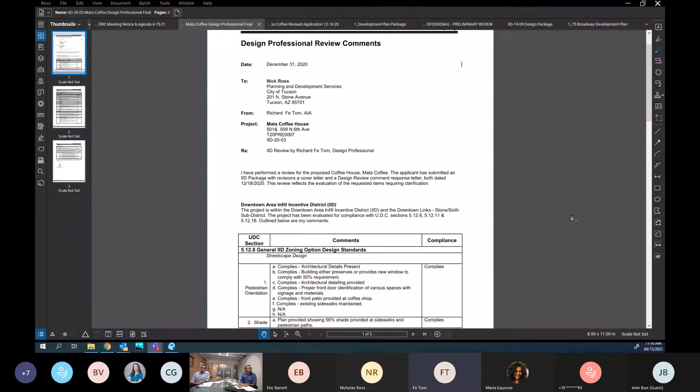Okay, thank you. Let's see, I don't have my notes here in front of me. Fe, I have added your approval recommendation on the screen, so if you want, I can scroll through this as you discuss, if you like. Okay, that'll be fine.

With regards to the streetscape and the requirements for the IID zoning, the pedestrian orientation, we went through all the variables that were there and found that they complied with that. The shading part of it was also in compliance.

The next one is parking. I think, from our standpoint, it was compliant. For the Downtown Links district, the permitted use is compliant. The historic preservation, we found that to be in compliance. The loading, solid waste, landscaping, and screening, that was in compliance.

And the landscape was in compliance. Solar exposure was in compliance, parking compliance. Alleyways and pedestrian access ways were in compliance.

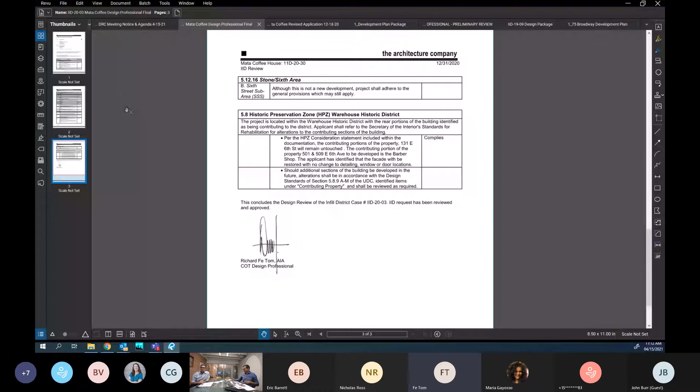Thank you, Fe. For the committee's information, this project did go to the Plans Review Subcommittee on March 11th, where they did recommend approval as presented, excluding the change from the garage door to a window on building 509 facade, and excluding the signage, which will be reviewed later. Mr. Chair, I think that concludes the staff presentation.

If you're open to it, I think the applicant is available to now present their design package. Okay, ready for you, the applicant, to do the project presentation. Richard, you're muted - if you want to share your screen, you're more than welcome to, otherwise I have your application up as well. Yeah Nick, we just unmuted. So in terms of sharing our application, you just want us to walk you through the gist of it?

Go ahead, I don't know if you can see my screen, but I'm in the middle of your application here. If you have additional materials you'd like to present, you're welcome to, but this is what was provided to the DRC ahead of today's meeting. That's all I was going to do, pull my copy of that same package up. I wasn't exactly prepared to make a presentation because I thought everybody knew what was going on, but that's okay, we can make it up as we go along.

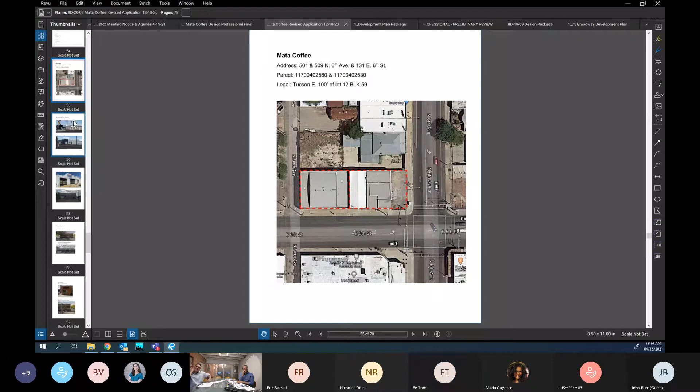I should look to see if there are better slides for me to talk through than this. I probably should control over this. Can we take control of it, Nick? Feel free to share your screen. Okay, so then we would pull up ours. Isn't it there on the right? I turned all my stuff off. Let's move it over here. Okay, let's see, this is a terrible version of this, it's so small. Give us one second here, guys, let me get up to speed. I'm going to share my screen right now. I don't know where the share screen button is on this, is it the arrow on the right there? That's correct, it's the arrow in the little box. Got it. All right, so everybody can see our screen right now? Yes.

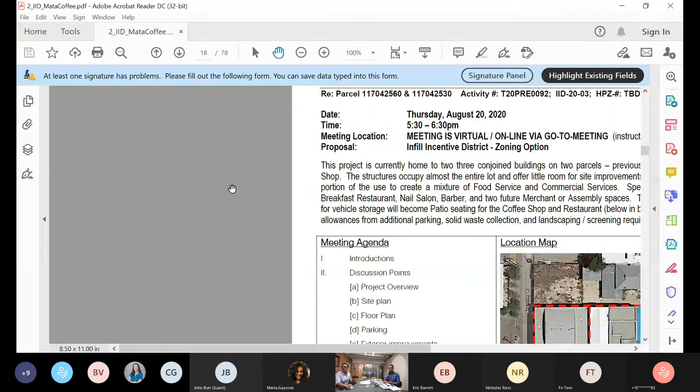Let's zoom in here. This was the same image we were just looking at, but I wanted to pull this slide up so this area is highlighted in blue. Again, two parcels with buildings entirely built out on the whole parcel, with exception of this little blue strip here. That was previously paved area that the auto repair shop used to store cars. It has ingress and egress off of 6th and 6th that we're proposing to fill those curbs in.

Transportation requested that we fill this in, and we would like to turn this into a covered patio area. I should back up and say we have this entire area right now that we want in our IID. The work we're doing right now is limited to this area here. What we're proposing is a mixed use development. We would like to put a coffee shop right here, that's why we're calling it Mata Coffee. We would like to put a barber shop right here, and an eyelash salon here. This will be a future restaurant where we're building the kitchen out right now but not the rest of the restaurant. The idea is that this patio area would serve these uses, focused for breakfast and lunch.

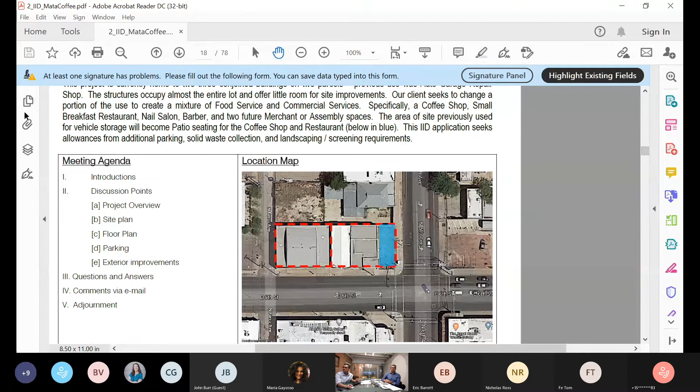Miguel from Forge Architecture also. What Richard Worley said was TDOT did not find any parking in the blue area that met requirements, and TDOT also didn't like that the curb cuts were so near the intersection.

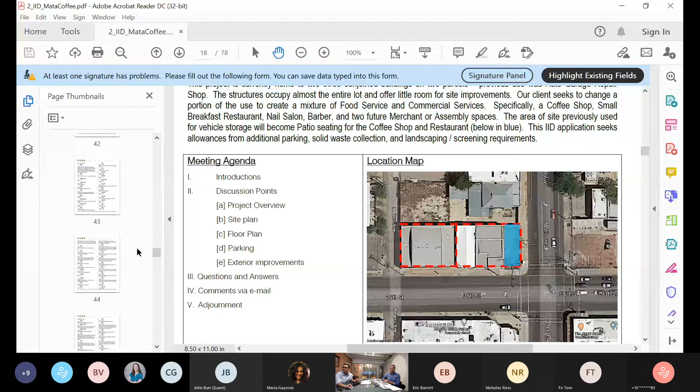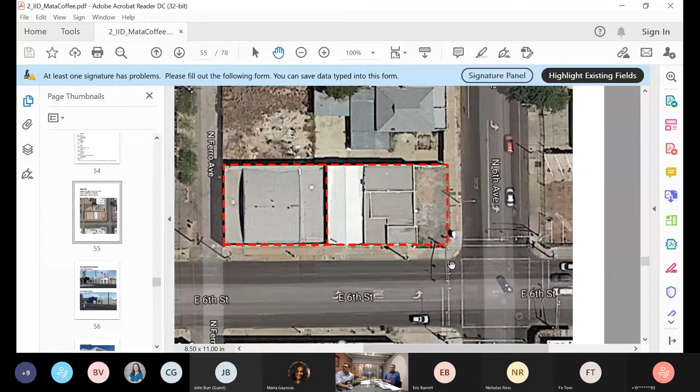Let's move on here. These are some views of the outside of the building, so let's back up to this slide. So you're standing here looking in this direction. What we're looking at here is the unpaved area that used to be the automobile storage, where we're proposing our patio. This building here is not historic. This building here is historic. The rest of the buildings are not historic.

We're putting our coffee shop in here, our barber shop here, eyelash salon here, future restaurant here, and patio out here. This piece here is the only part that was historic, and we're keeping it intact, making no changes to it. We are making facade improvements to the area that was not historic. This area here is part of our project that we're including in our IID, but we're not doing any work in this part of the project.

Let's go down, another view of looking at it a little bit closer from the 6th Avenue side.

Precedents that we thought were good precedents of things in the area with uses like restaurant, entertainment, tap and bottle, XO Coffee, and the Royal Room.

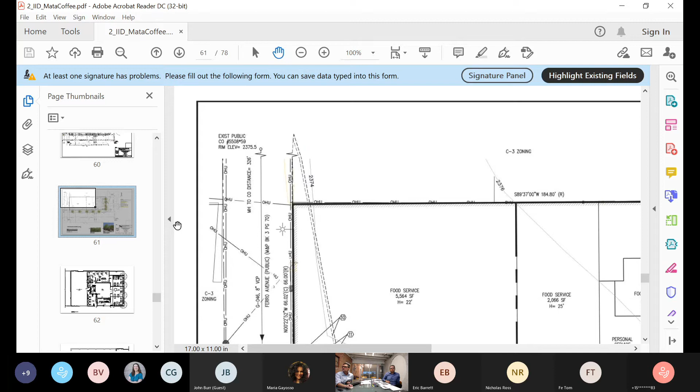Let's go through here, zoom back out a little bit. This is the landscape plan. We're proposing to increase trees along 6th Street, mostly for shade. This is our covered patio, and we also have trees and plantings in this area as well.

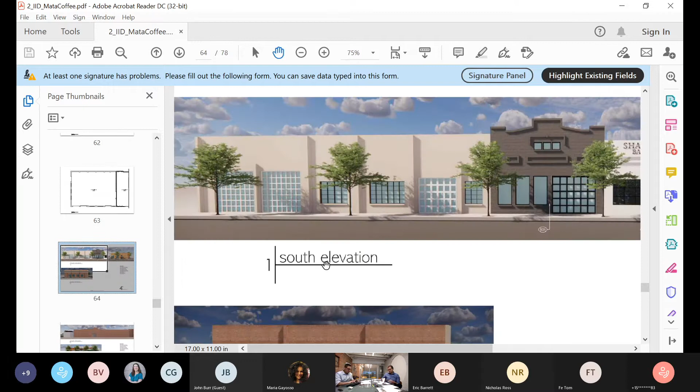Elevations of our intended design. Again, if you recall from the photographs we just looked at, this area is a historic building, no change. This is also a historic building, no change.

This area here, we're putting a screen wall over it just because the building was small. We didn't really think it had much street presence, so we're trying to make it look a little bit more interesting.

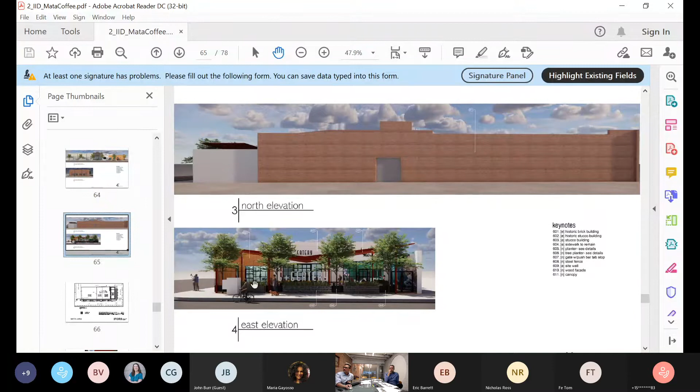This view is looking at it from 6th Avenue. This is the elevation of the patio that we're talking about building here. And this is an interior shot of the patio.

I'm going to talk a little bit more about the patio, Richard. So the patio used to be a garage, and there was a mid-century modern kind of cool canopy over it. So we took some inference from that.

Obviously it had been ripped out, so we created our own take on a big, impactful canopy that created all the outdoor seating. We wanted to create a lot of presence on the corner and a lot of visibility, even though we know we're going to have a little bit of a problem with homelessness.

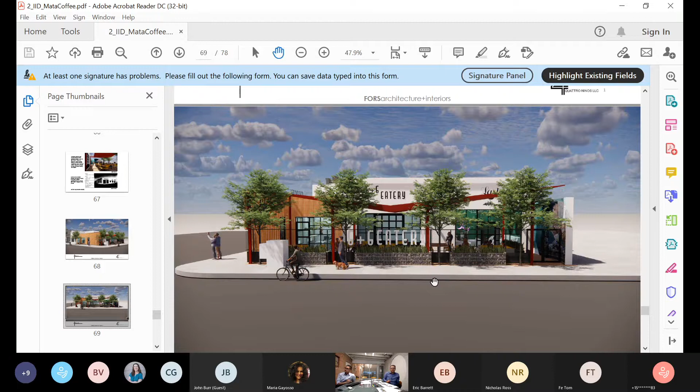We wanted to create a lot of shade because the spaces are pretty small, and these didn't have any interior seating on this side. So most of the seating is actually all exterior, on the breakfast eatery and on the coffee shop.

So let's go back to this view here because it kind of encapsulates the whole project. Again, the historic piece that we're keeping intact, that will be the barber shop. This is the area you were previously looking at, and that is our coffee shop, which kind of wraps around the corner.

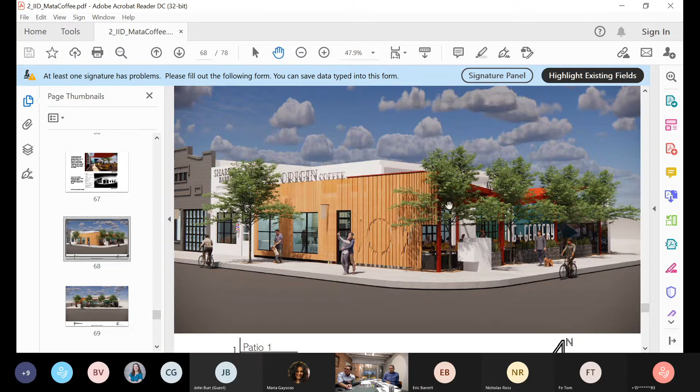So this is 6th Street, and this is 6th Avenue over here, and the covered patio that we're proposing to serve the coffee shop and the breakfast restaurant.

Again, some enlargements showing the feeling we'd like to have on the patio. We're proposing a mural down on this end, with trees for covering. Again, this is mostly to serve for seating because the spaces were so small for the coffee shop and the restaurant that we needed this area for seating.

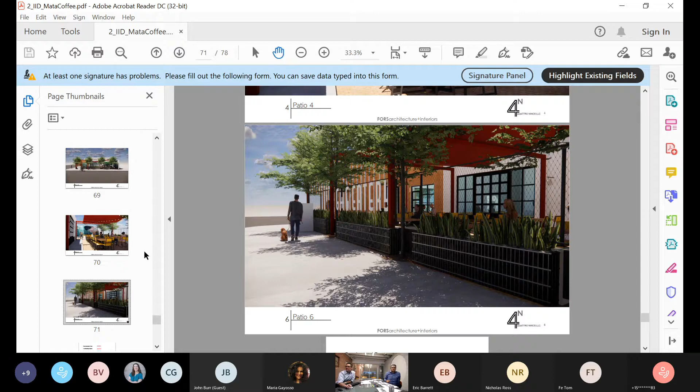This is the view of the streetscape we're proposing. Again, we believe this project would enhance the street with the trees, improving the urban area in terms of having people out here congregating. We thought it would be a nice addition to the neighborhood.

The very end of the proposal jumps back to the historic elements I already alluded to. Everything in red is historic, and everything in blue is not. And again, this is our patio.

So again, this is the area where we would be doing the facade improvement work, and this area we would not. Those areas in blue, including the one immediately adjacent, already have tenants.

They are all actually their own tenants for all these spaces. The owners are going to be occupying all of them, but they haven't secured tenants for the ones to the west.

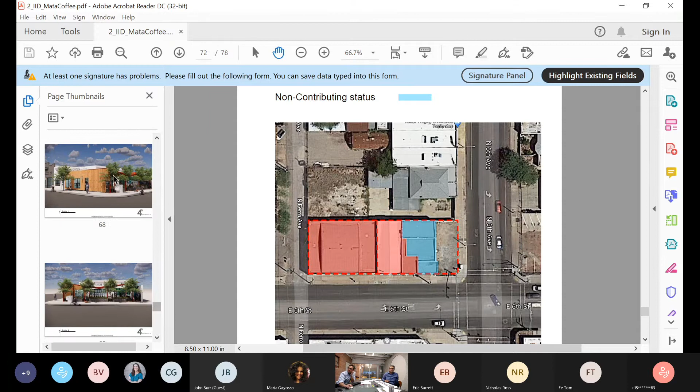So I think that's about it. Nick, I'm going to back out to this slide.

Would you like me to give control back to you? You can stay controlling the screen because I think the DRC is probably going to have some questions for you, so it might be easier for you to navigate.

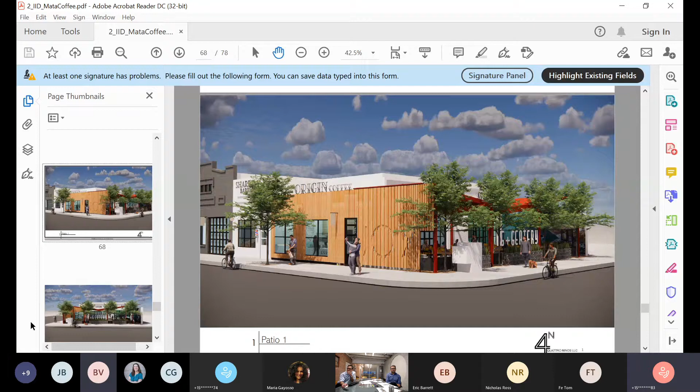Other questions? This is Bill, I have a couple questions. The south facade of the building along the coffee shop, what's that to be made of?

That material is called thermory, and it's a wood that comes from Austria that's oven-baked. It's a special material that we can use. We just used it in a house in Rocky Point, and we're using it in a couple other projects. It's especially made for extremely hot, arid climates.

And what's the overall square footage of all the buildings on the site? Gosh, I don't have that up. I think it's about 9,000 square feet for all the buildings. It's definitely in here somewhere, let's see, development package.

While you're doing that, Nick or Fe, do you know if there's parking on the street on 6th Street or 6th Avenue? Is there metered parking? No, there's not. This is Miguel. There's a lot of parking basically up and down 6th Avenue on both sides of the street. There's no parking on 6th Street, but there is on 6th Avenue, both north and south of our intersection.

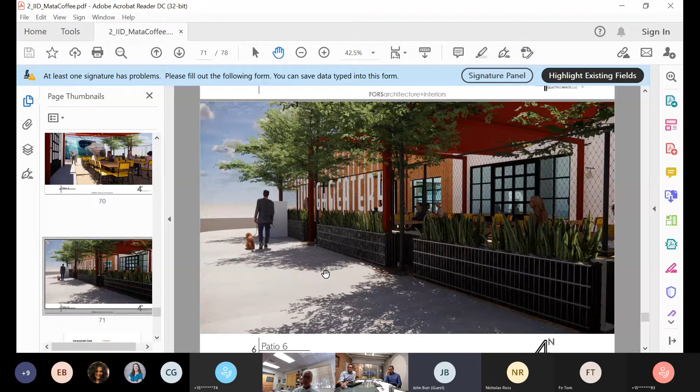On your initial application, it showed that you were providing 2 long-term bicycle spaces, even though no parking, but that's not showing up here. Are you providing any racks for pedestrians who bike in, maybe in the north part of the courtyard near the art wall, or for staff? Or are they all expected to walk in and leave their bikes elsewhere?

Well, this project is actually concurrently in building review right now, and of course we would have to meet those standards based on the building review. So the answer is yes. Right now, the plans submitted and currently being reviewed have bike parking in this area, long-term and short-term. Ultimately what was submitted was the first round of the development plan in order to generate comments for this IID. The second development revision is happening right now, and it also has to meet city standards for bike parking, showing bike parking in this area as well.

So you're committed to put in short-term racks for your clientele in that area, but not a specific number yet until staff tells you how many? Well, we know how many, I don't recall them off the top of my head, but we're required to meet a land use code standard for long-term and short-term, whatever that number was in our plans. I don't really recall it off the top of my head. It was not a lot. I think it might have been like 2 short-term, 2 long-term, something like that.

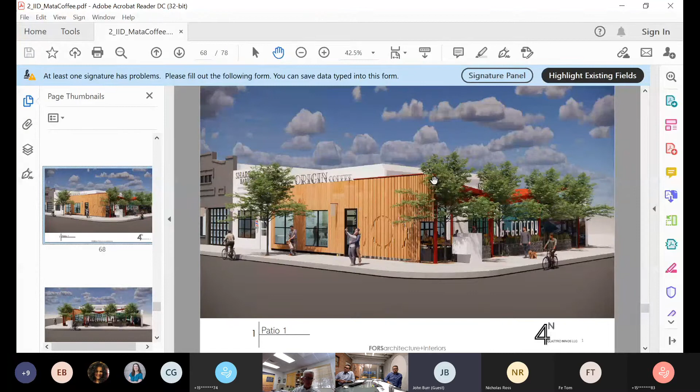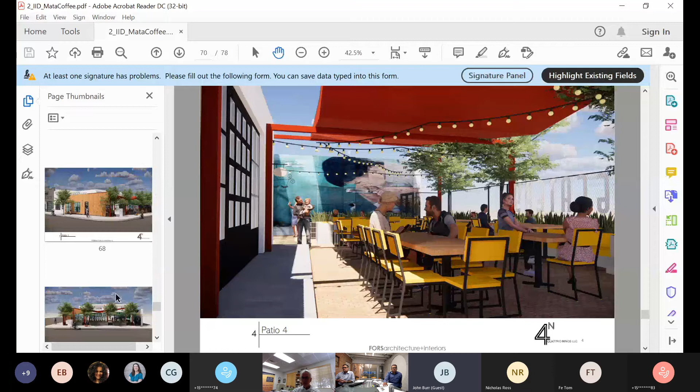But it led me to further questions, because we're talking about existing buildings with all the windows as they are. I started to look, and there hasn't been a permit pulled on this property since 2004, and the current owner purchased it in 2014. Yet magically all these changes have happened. For instance, the non-contributing building has been stuccoed and you're now popping windows in, and the placement of the doors and windows on the east side have changed.

And magically, from a stuccoed front, the barber shop now has a gridded frame window that is listed as contributing, but farther down in your package it's showing the historic property card that shows it's a Spanish colonial building that actually had a tile roof, and Google Street Views show that was removed in about 2014, somewhere between 2013 and 2015. I'm a little surprised that contributing properties in a city historic district have never been reviewed for all these already existing changes.

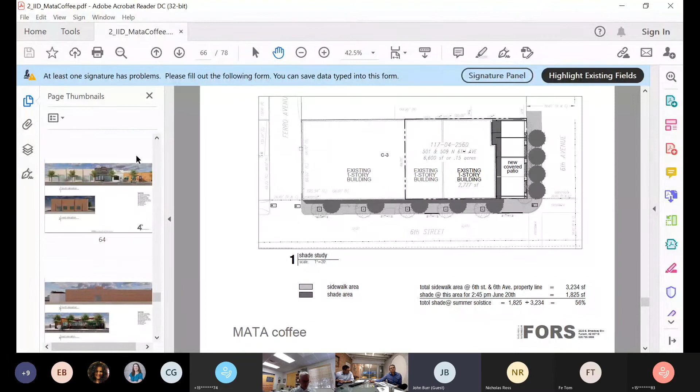The tile roof was taken off. Your new facade suggests you're taking off the parapet on the barbershop building on the east end, and I don't quite know why. I don't want to just magically approve this project saying that's existing, so everything that's happened to date actually meets all standards, because the barbershop building now has lost every character-defining element to it. So I kind of have a problem with that.

Well, let me jump in. First of all, the barber—we have not eliminated the existing parapet. We actually haven't done anything. I think what you're talking about is the wing wall that faces maybe east. I'm not sure which one you're referring to.

Yes, the eastern parapet wall that you just see in profile from 6th Street, but you can see it as a full-on parapet from 6th Avenue. Right, and your facade no longer shows that, and the tile roof that was the contributing defining feature was removed without a permit within the last 7 years, and it's not proposed to be there. So theoretically, I'm not sure it's a contributing building anymore, because it's lost all of its contributing status, unless you're proposing putting a tile replacement roof on that particular facade again.

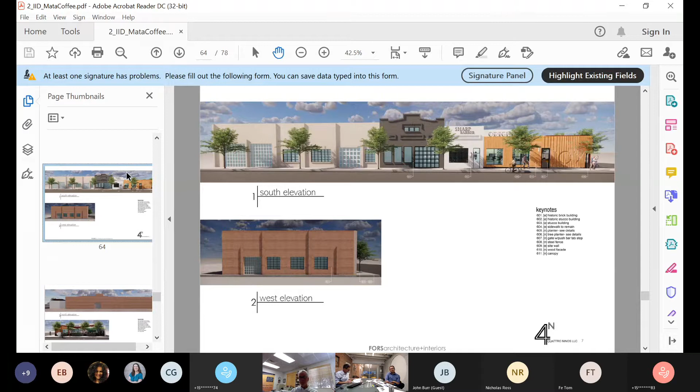Well, we're not aware, first of all, that our client removed that. We took over the project with the facades as they are now, and we did step in and show all the photos to historic. That comment did not come up with historic, and I was not aware that we would have to verify that and verify your photos. Not saying that's not right, but we were not aware of any of that happening with this client or them ripping it out or having removed it.

I appreciate your standing, and you've come in fairly recently with an existing building, and I think you did a great job adapting it. I really don't have a problem with your whole concept or the plans we're approving today, but I don't want to backdate an approval for what was pretty much an egregious, unreviewed, substantial change to a contributing historic structure that should be commented on before it just keeps moving forward.

And you can see the tile roof if you scroll down to the bottom of your package and look at 139 East 6th Street, and it does indeed show those tiles. And then if you look at the timeline on a Google Streetscape, you can see exactly when it disappeared.

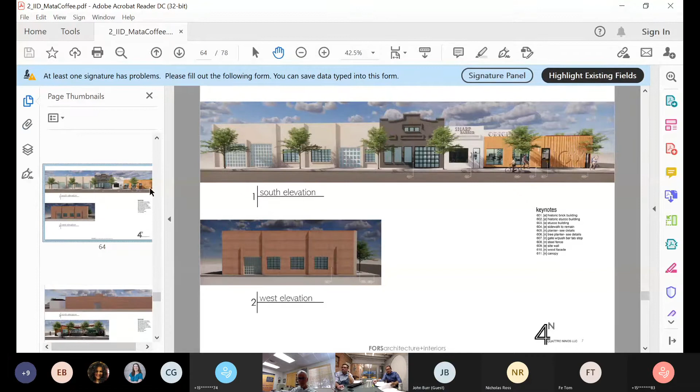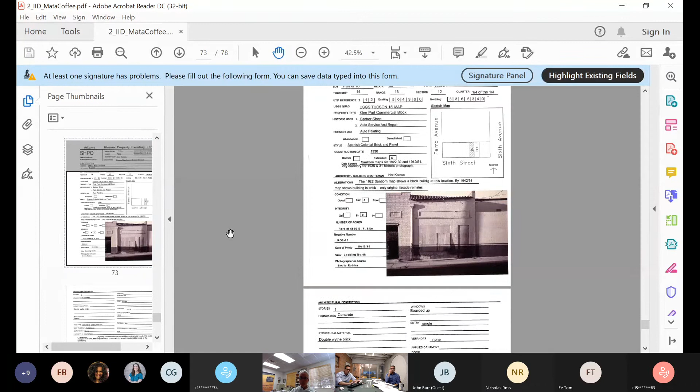Yeah, I'm just not sure when. That photo doesn't necessarily mean—I know you said you checked it back in 2014—but I don't know that photo is actually recent, sometimes they reach back to older photos of the properties when doing the assessment for contributing versus non-contributing. It's an ancient photo, it's black and white right here, not recent. It's from 1995, but that tile roof was there as of 2013, and it was not there as of 2015, and that was really the only thing on the facade that made it Spanish colonial.

This is Nick. Yeah, we do have Jody Brown, our historic preservation officer, on the call today.

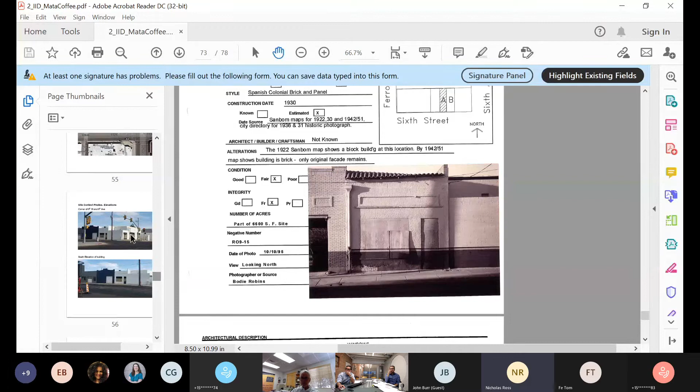Jody, are you available to comment on the significance of that tile roof and what that means for this project?

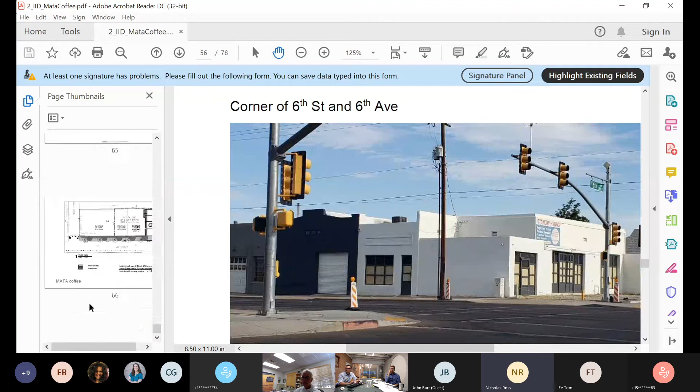Sure. I'm not aware of the building being delisted by SHPO. It is a contributing resource to a National Register district, so it speaks to the whole. It's not like an individually listed property where integrity would have to be pretty pristine or pretty high up there.

I don't think the removal of the tile roof is a good thing, for sure, because it definitely gave it a nod to the Spanish colonial style, but it wasn't something I would categorize 100% as Spanish colonial, and I don't think removal of the tile would necessarily delist the building.

It is something that was probably removed. I mean, it was probably just a little shed roof that was up there. It was a decorative feature, not a full tile roof. Likely they didn't get a permit for it because I didn't see anything for it, but I don't know that they would have had to. They weren't doing any other work associated with it. It's a minor modification, so I don't even know that that would have triggered a permit.

Okay, fair enough. It's not ideal. I mean, it's historic fabric that was removed.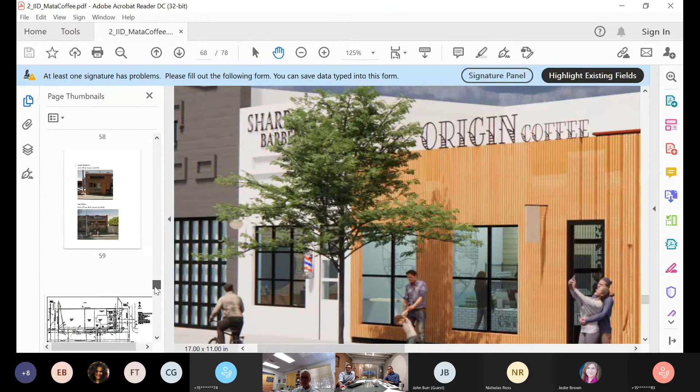We can chime in. Again, this is a conceptual rendering, and in the building plans we submitted, there's no work happening to this facade at all. This little area here that looks like we extended a parapet, we did not. This piece above it up here is not in the plans we submitted to the city. We said we were not doing any work to that facade, and we're not. It's going to look just like this, exactly like this, with no signage, nothing.

We're working inside on that parapet, but we're not touching that parapet itself — we're not ripping that down. We're not doing anything to this building. It's just that in the rendering, the little tab is not shown. The rendering makes it look like we're tearing this down or filling it in, but we are not.

Okay. Are all the windows that are there now steel or aluminum? Steel — they're all steel, it's a steel storefront system, the doors too, all along the east, and the replacement windows in the barber shop. Yeah, all these windows are the same. They were custom windows made out of steel.

Okay, and it looks like you're going to close up some of the driveways on the curbs. Are you planning on closing all of them? The two to the far west are actually some of the old 1938 concrete with scoring patterns, so they're like what's left of the streetscape. I'm not sure it will matter because that's going to be a major corridor pretty soon, but I'm sure TDOT has something to say about all of that.

But TDOT asked us to close those up because they don't want the ingress and egress too close to the curb and to all of these facilities. So they asked us, as a condition, to close these up.

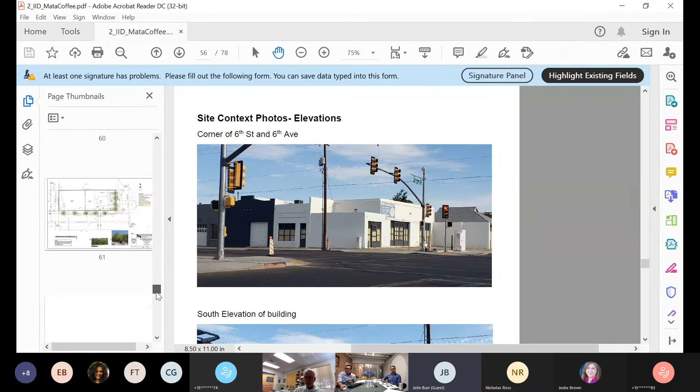Yes. Do you think that will be sufficient if you expand all of that area eventually to food service, or will you have to make other accommodations as you expand further west?

Well, I can answer some of that based on our experience, having done over 20 restaurants in the downtown area. We start with the idea that it's all rolled out daily and put out there, because in our projects downtown we've had almost every other day pickup for trash, in order to accommodate those, and the ones we've done down 4th Avenue.

We're not in a vicinity right now where we have a compactor, which obviously in the future will alleviate this. But we have a plan also with the owners, because they also own the Tucson Blue building, which has additional trash. So we would probably accommodate or be able to expand the trash storage based on usage.

Okay, but you think it's certainly sufficient for what you're proposing currently? Yeah, because the coffee house is, as you saw, pretty small.

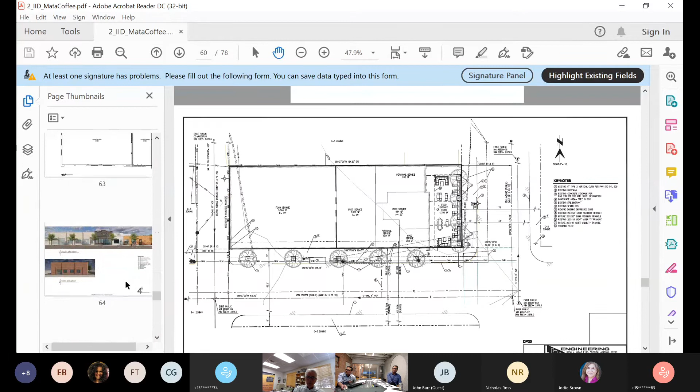There's no seating in the coffee house. And also the future breakfast place, which will be only morning and lunch, based on our experience and analysis, we're okay right now. But the owners have talked about adding, if they need to, down on Tucson Blue.

Okay, and what do you think the full maximum occupancy of the site will be? Just for people? Yeah, no pets. No, I meant occupancy, as in, because we don't really know what's going to go in the left and the right.

But obviously we would be at a plus 250 occupancy for interior and exterior seating if they were to do those functions to the west, which there's no guarantee of either. But in the current area, it's probably more like no more than 75 on site.

Yeah, I mean, we're pretty tight. We're showing more seating there than I think we're even going to get for. Because most of that where you see dining right there, that's actually turning in, since most of that project is going to be all kitchen.

Because of what you're seeing right now, the build out on your plan is just the back of house dishwash. So there's still the cook line, storage, refrigeration, and all that, which pretty much takes up that whole footprint.

Okay, all right, I think that's it for my questions. As I said, I don't have a problem with the concept you're presenting today. It was just some of the background issues that I had. Got it. Yeah.

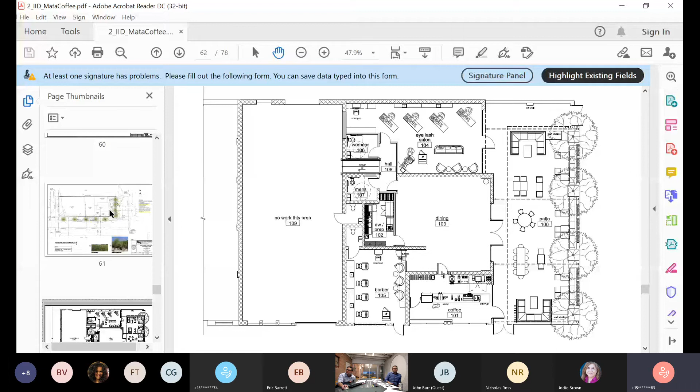The 6th Street mesquite trees, and in the neighborhoods in the Northwest, University has had a pretty challenging issue with mesquite trees breaking up sidewalks and curbs and uplifting pavement. So how are these trees being planted to prevent that from happening?

Well, right now we were hoping for the standard 4x4. TDOT said they might have an issue with those three to the west, and we might have to pick a smaller tree that's in a raised planter. The ones to the west are the last three. They might have a problem with those being in the ground with all the utilities there, and they might make us do a box tree that's raised and different.

Okay, can you expand on that some more? I understand utility conflicts and issues with that. Can you also explain, is this going to be like a 5-year plan where you change trees out every 5 years, or what's that look like? Because trees in boxes don't last long.

Well, it depends what tree it is too, right? Is that you, Eric? Yes, it's me, Eric. Hey, Eric, sorry, we can't tell on our screen right now because of our screen share. Well, Eric, we were going to let Norris, our landscape architect, do the final selection if it has to change and we can't go in the ground. But sure.

They were talking about trees that could survive in a box, but it wouldn't be a mesquite. I'm not going to object, I don't mind them picking the tree, that's all fine, I don't have any problems with that. It's just more of, again, it's like a fish in a fishbowl. It's only going to live for so long, and at some point it's going to need to expand the box.

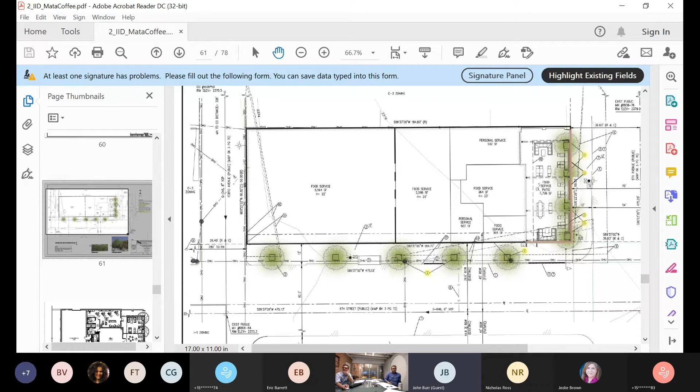Is there a motion? I have a procedural question. Nick, if we want to make sure there's a little bit of oversight so it doesn't look like a chain link fence, can we direct that be approved by the design professional? The specific material, is that what you're referring to? Yeah, so that it's compatible with the character of the overall design and not just a chain link fence.

Yes, we can have the design professional review the screen material as part of their building package submittal. And everything for 131, 135, and 137 will have to come back to both us and plans review? You're referring to the historic buildings to the west of what they're proposing? Yes, so any exterior work that is going to occur on those buildings will need to go back to PRS and the DRC for your approval.

Okay, is there a motion for approval with conditions? I could try one. Okay, in the matter of IID 20-03 Mata Coffee, we recommend approval as presented with the following conditions.

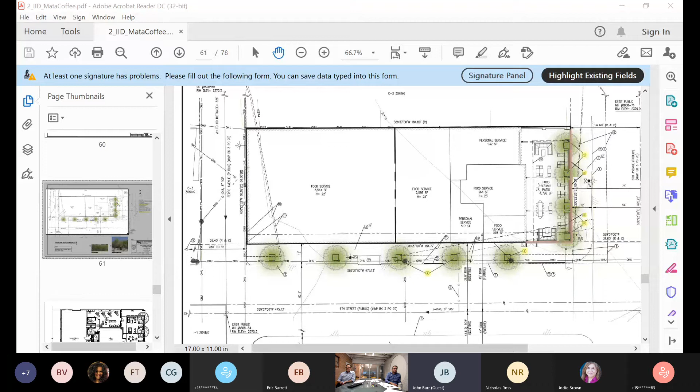Good luck with it. Thank you. Thanks for taking the project on. We like the hard ones. With no budget. All right, thanks, guys.

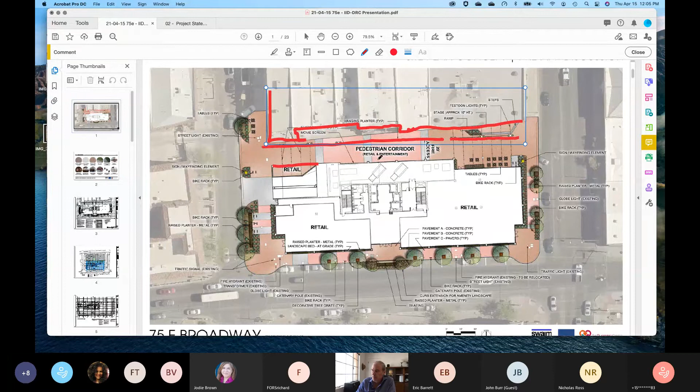So this project is focusing on the south side of the site. The other thing you can see in this photograph is we do have a column line that runs basically along the existing alley easement. So we are working to acquire the alley from the city of Tucson and be able to basically cover that alley, restrict the access for only fire and after-hours deliveries, and then keep that mostly an open pedestrian area to create this kind of permeability through the site.

And then we have some other modifications to the buildings to the north that will basically enhance that pedestrian connectivity. I'll show you in just a second.

One thing I do want to point out is our development team that is acquiring this property also currently owns the entire north half of the block as well. So they're really looking at this as the retail revitalization of the entire block, and all of this kind of working together to achieve that.

From a streetscape perspective, this shows just sort of graphically the material palette that we're looking at. Sorry, I'm trying to get rid of some of these red lines.

So through the new alley itself, it'll be fairly open because we do need that for fire access, but we do have space here between the new columns and the existing buildings where we're going to be able to have some exterior amenities that will get developed over time.

On all three streetscapes, on Scott Avenue, on Broadway, and on 6th, we are adding some landscape elements, including street trees and some planting beds, some raised steel planters in a couple of areas, in addition to some short-term bike parking in all of those locations as well.

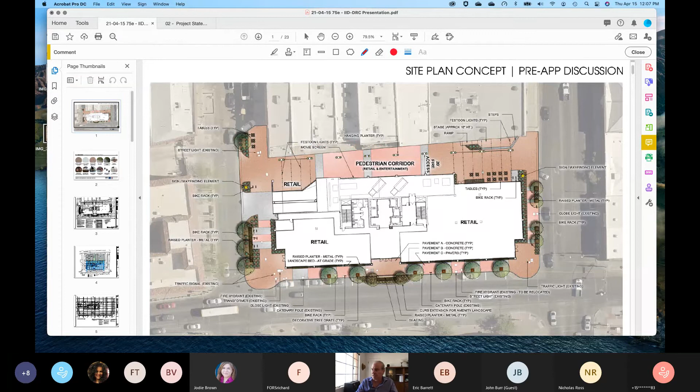I think quickly just to talk about— I'm sorry, let's go to the next slide. So from the streetscape perspective, we're really looking at the adjacent recent developments, so the Scott Avenue improvements, the TEP building, and drawing from those same palettes to create our streetscape.

So we'll have the metal planters, different integral colored pavers, tree grates, all the site furniture and other amenities. We're even looking at creating some kind of dynamic or interactive opportunities with projection and things at night in that pedestrian alley.

But the real intent for this, what we're calling the pedestrian corridor, is to make a pedestrian friendly, well lit, comfortable space that you can move through. Some of our new retail has frontage on the alley, and all of the existing buildings to the north will have frontage to the alley. So we're really seeing this as another set of entrances into these buildings from this new pedestrian corridor on the ground floor.

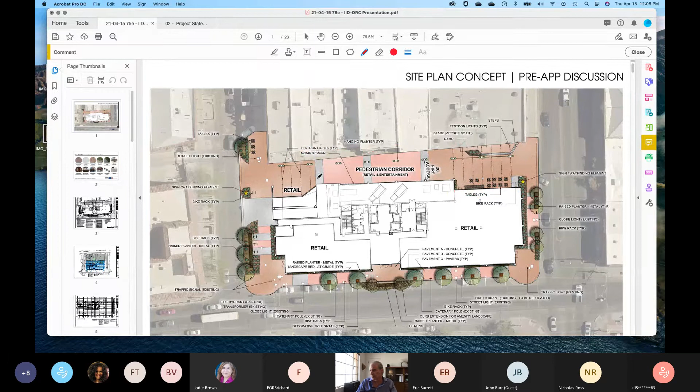This is the landscape plan. Again, just the actual technical drawing. This has the correct background though for the building itself.

I'll talk a little more detail about how it's organized when we get to the architectural drawing. I did want to show this drawing. This is a little bit earlier and more of a concept plan, but you can see that urban pedestrian corridor cutting through east to west.

Our building lobby cuts all the way through into that, so we have doors on the north and south side of our elevator lobby. The intent is to take the middle building of the north block and create a pedestrian access through here. Maybe we develop some small retail spaces in this corner, but really we want to see this kind of cruciform permeability throughout the site when this is complete.

This center building is a historic building, but it's also had significant modifications to the Congress facade. This was Rob Paulus's office for a while. So we believe we can make some further modifications to make this pedestrian access work, and obviously we'll work with the Historic Commission as well on this.

For purposes of what we're doing right now, though, we're not doing any work to this north side of the block. We're really only proposing and submitting the new building itself.

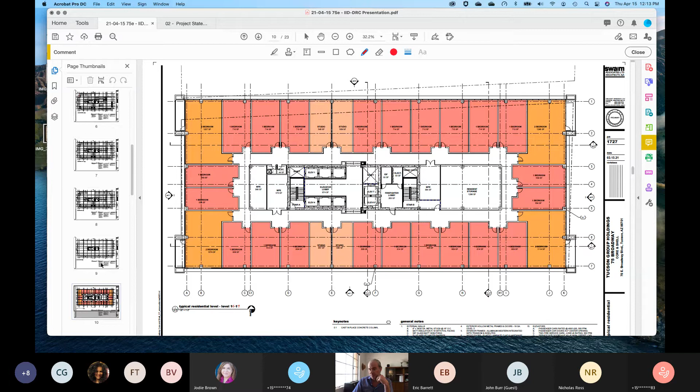Another added component to this project is we have an 18th floor amenity deck. At the 18th floor on the west end, this would be our mechanical space. On the north side, we're providing a space for a restaurant and a restaurant terrace. Then we have a small conference center with another event terrace on the east end. We have a community room and residential terrace for the residential users. We have a fitness room and then an office terrace, so the office users have an exterior space. We don't have any terraces or patios on the office floors.

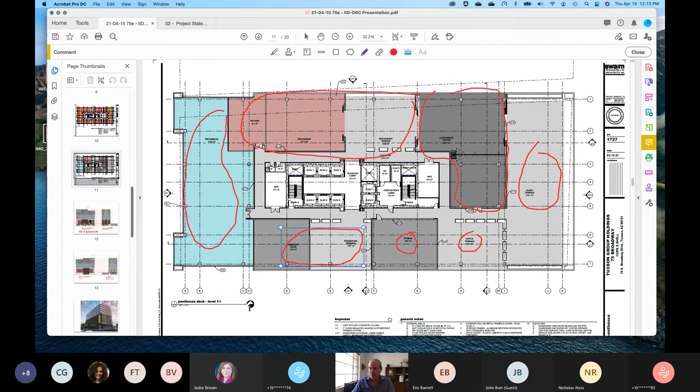I want to walk through a little bit of the design evolution for this project to explain how we got here, and we've actually had some revisions since this. Nick, after the meeting, I'll send you this PowerPoint so you can have it for the record of everything we're showing today.

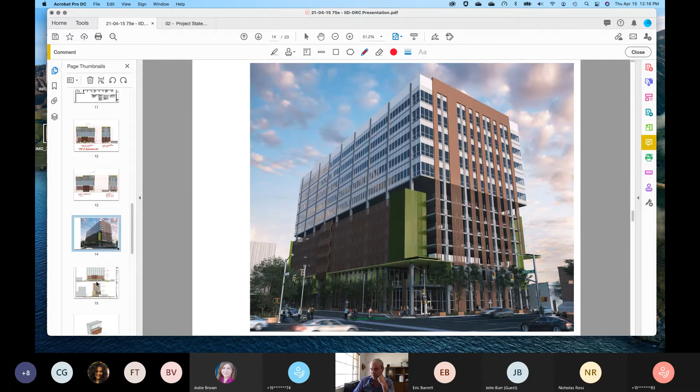To take you back in time a little bit to show how this project's changed - this is where we were about a year and a half ago with the building design. At the time, it was a 12-story building, with 5 floors of office, 5 floors of parking, and 2 floors of retail at the bottom, really trying to create a rhythm on the streetscape that would mimic, to a certain degree, some historic patterns of larger storefront openings at the first floor with smaller punched openings at the second floor. Kind of like the Julian Drew building has that pattern, the Chicago store has that pattern on the Congress side. So really trying to maintain that rhythm, but in a contemporary way for this building.

Again, like I said, this was about a year and a half ago, and then we got a call from the developer saying they wanted to expand the project. So we went from 12 stories to now 18 stories. And that's when we added the residential components, and really we needed to reconsider the design.

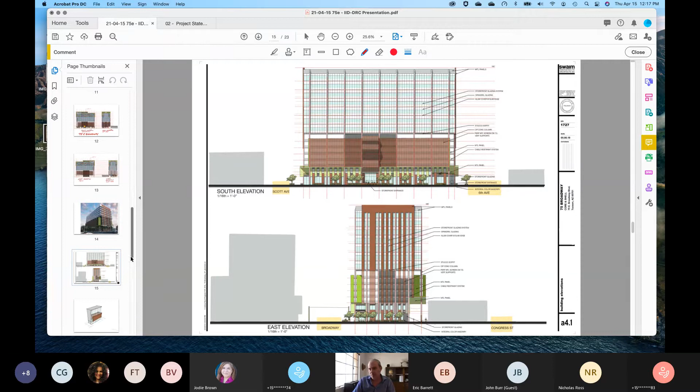We didn't want to just stretch this current design to 18 stories. It didn't feel right and really wasn't doing justice for the project. So we went back to some early concept sketches. This was just kind of a sketch that I did, trying to think about how to start

to organize the facade of the building, with this idea of two folded plates, one from the west elevation coming up and creating a roof, and then some kind of a folded surface that would create that garage screening. And then, obviously, the glazing and the occupied spaces in between.

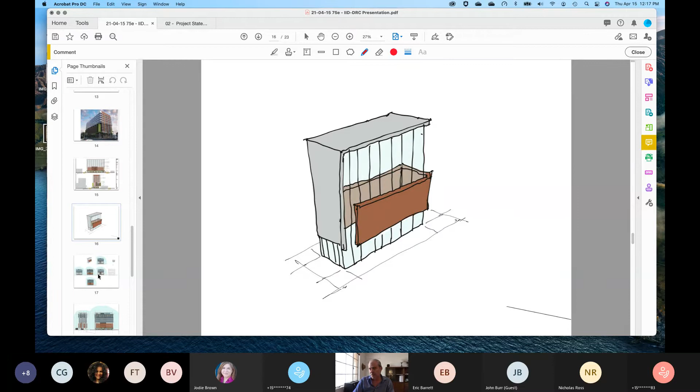So we took that concept and went through a whole lot of different variations, looking at where we would have, for instance, this scheme has the office floors in the center, residential floors above it, thinking about how we can detail those so it becomes a little more obvious what the uses are. We flipped that in this scheme. So we ran through a lot of different design scenarios, thinking about this concept and trying to find different variations

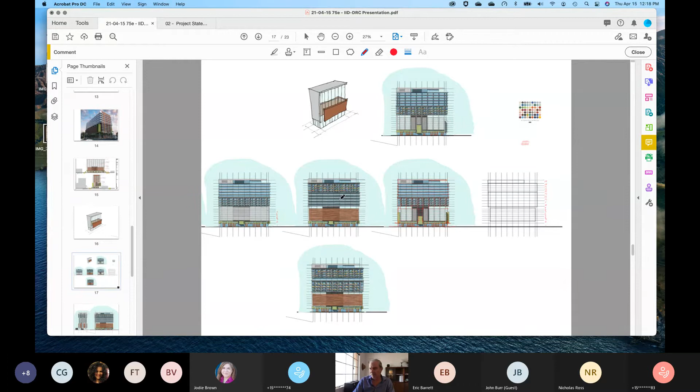that might work. What we landed on initially was this concept. The residential levels are on the upper part of the building here. The office levels below that have more of a continuous glazing because of the use of that space. And then the brown area is the garage screen.

We still don't know exactly what this is. It's some kind of perforated screen. I've always thought about it as kind of an old penny sort of color to it. And then at the ground floor, we still have the two floors of retail, and that's subsequently gone down to one. You'll see a drawing in a second that shows that.

Again, this would be, the gray materials would be some kind of composite aluminum panels with storefront glazing and some spandrel glazing. With the residential levels in this scheme, we actually had balconies for every residential unit. So these were sort of boxes that would extend from the building and have those balconies outside of the main

floor plate. And then we created this kind of color scheme to show the different units. So for instance, this yellow area, that is the unit. It spans that divider between the two. So we're trying to develop this sort of language that talks about the internal workings of the building. And then we have the upper floor, 18th floor amenity deck with primarily the mechanical on the west end,

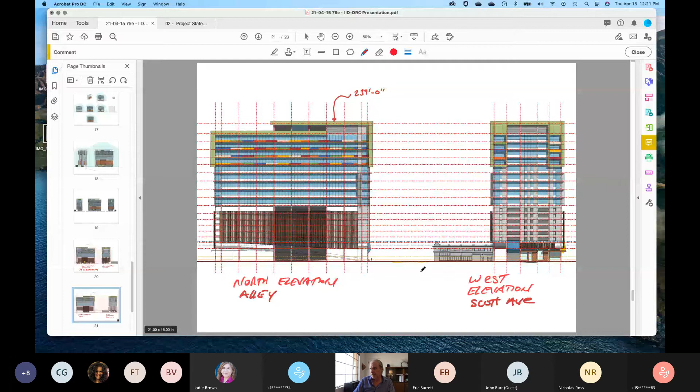We're also in these drawings now showing the Chicago Music Store in relationship to the west facade, and in the next drawing, there we go. This is the old Wigorama building here, and you get a clear sense of scale. This is a large building adjacent to some fairly low-rise buildings, but I'll show you the new design, how that's kind of being managed.

So these next two slides show where we currently are. What we've been concerned about, and I'd like some feedback from the committee, is this layer cake feeling we keep getting. It's the nature of the uses of the building that we have these stacked uses, but it hasn't quite felt right in the design in terms of how the building starts to feel like one unified composition rather than these three things, like a wedding cake.

So in this last scheme, the blue parts are basically the green parts—we're still working on the color palette. The idea is that these are more like ribbons that fold in and around the building. This creates the roof, comes down the side. These are those balconies again, which is basically this same area here.

And then that same blue material continues down and creates enclosures at the corner of the garage where we have some storage units. On the south facade we're doing something similar, with the balcony extensions here. That same material folds, comes down the center, folds out, and creates the main entry canopy for the building on the south facade. When you look at how we're starting to look at the historic buildings, we're trying to pull lines.

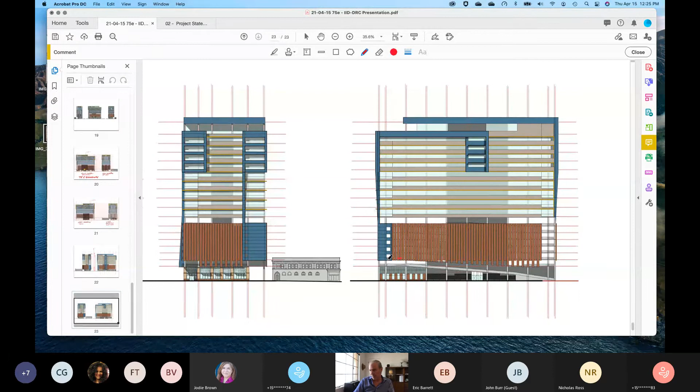So this final drawing is the actual north facade, cutting through and looking into that pedestrian alley. This is our ramp coming up to the first parking deck, and we have more design work to do in this entire area because we really want that to be a comfortable pedestrian environment. Having a parking ramp there with cars flying up and down, we need to create more screening to make sure that pedestrian experience is the best it can be.

So that's the quick walkthrough of what we're proposing. We're sort of mid-stride in this new redesign, so coming here today and getting some feedback from the committee, given the high profile of this project, was important, so we can take your suggestions as we complete the redesign, and then come back to you in probably a month or so with a revised design to get more feedback on. So with that, I'm happy to take any questions—see what the committee thinks. Thank you. Any questions?

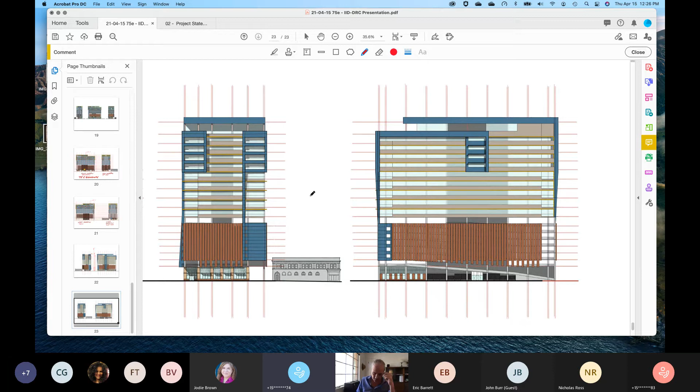This is Robin. Can you hear me? I'm having a little technical difficulties. I'm afraid my video is not working, but can you hear me all right? I hear you. Yep, yes.

Michael, thank you for the presentation and the story of the development of the project. The scale of it is super exciting to look at, but also a little daunting to think about something of this size. Based on the evolution you've presented today, I really like the direction of the base in this iteration.

In the previous iteration, it was feeling kind of spare at the bottom, so the weightiness of the top and the imbalance with the base felt a little off, a little uncomfortable in terms of that relationship of scale. But I really like this version, especially the relationship to the historic streetscape and the rhythm and nature of the base.

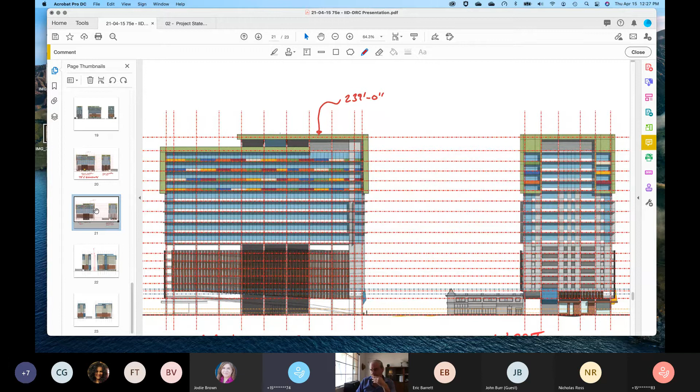What I'd still like to see is the articulation of the upper levels that I was enjoying in some of the previous schemes, particularly the use of color and depth. I understand where you're headed and why, but the sameness as you go up into those higher levels is feeling kind of heavy, and the articulation between the residential and the offices is not as clear to me.

I kind of downplayed it. The idea was trying to make the building feel a little more unified, because it was feeling a little fragmented to me.

I hear what you're saying, and I understand. It's this weird balance between the two. It's so challenging, because then there's the piece with the parking garage.

I liked the rhythm and articulation of the previous one, so there was less of a monolithic feel at the parking garage level. In this rendering there are more vertical lines that break up that band of the parking garage. But I understand this is a work in progress, and it's a challenging design problem.

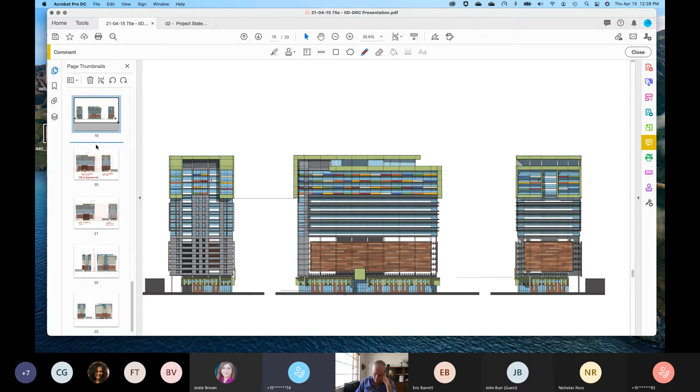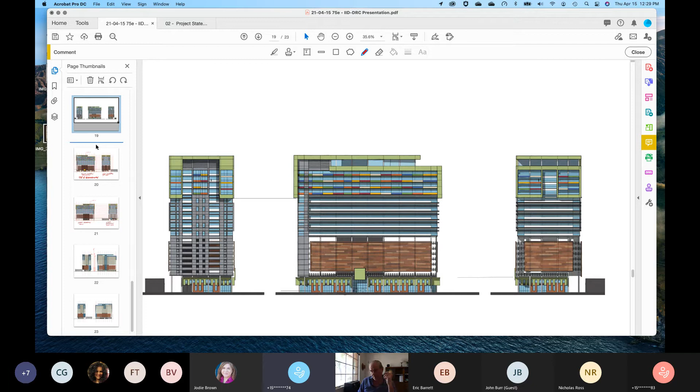It's a challenge to balance all of those uses at a scale of this size, without a lot of other precedents we can build from as we go up 18 stories. But those are just some initial thoughts, and I really recognize the work you've done to date.

Great, thank you. Other questions? I've got a couple. You know me.

Michael, I actually like the blue version tons better than the one we were presented with. I'm glad you're upscaling it, because when the first floor went to the squat thing, it kind of looked like a suburban post office, kind of squashed. I think the lower level with more differentiation matters, since most pedestrians will basically experience just the first two floors.

I hope there is a fair amount of articulation in that particular area, because that's how people will really experience it. The upper floors are what people will see from a distance as they're driving in or out of town.

I agree with the wedding cake concept. For a while it was starting to look like a strip mall with a prison on top, like a suburban office park with the upper part of Tucson House stuck on top, with absolutely no continuity in all the earlier iterations.

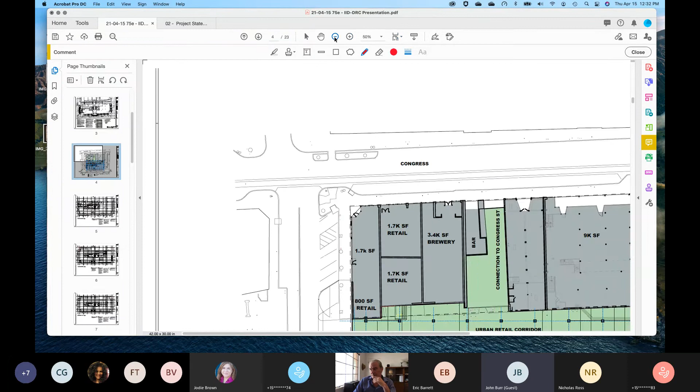And the other thing I'm still kind of confused at, I went to the last neighborhood meeting you have, and I like the way it connects to Congress, but I'll want to see the Congress Street facades and how it connects in. You were talking about activating the space and maybe putting in some landscaping and so on, which I'm not seeing.

But looking at the latest iteration of that first floor, I'm not sure how inviting that's going to be if humming transformers and generators and all that sort of stuff aren't baffled and enclosed. Is it going to feel like the backside of the Wells Fargo bank?

Yep, no, we're on the same page. That's a concern for all of us. So how we acoustically separate that, how we detail these enclosures so it doesn't feel like a utility, basically a bunch of utilities, which is what it is. This stuff has to go somewhere, so I think it's really a design problem, how we articulate this section of the north facade.

It could be we can introduce some small planting areas. We're looking at what we can do. We're also trying to figure out how we fit this stuff in there, because it is a really tight site. But we are totally on the same page that the most important thing in this space is going to be that pedestrian experience, because that's what's really going to help make this project work.

Maybe sound baffles or something, because nobody wants a 70 decibel hum from a transformer back there.

Absolutely. I was looking at some of the review comments, and Donovan was going on and on about compact spaces. The parking's gone from 500 to 489 to X to whatever, but 130 are compact spaces, which aren't legal spaces. How are you planning on addressing that?

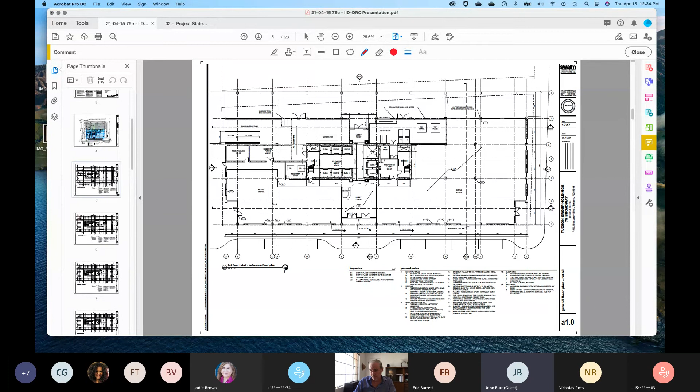And the other thing in the parking, I see currently there seems to be 20 EV chargers, but by the time this building is built, if you've got 134 tenants and some office workers driving, in 10 years you could have 90% electric vehicles that need a charge.

Sure, so you want to look at increasing that. Yes, and increasing it, and that really, the main component is to increase the electrical service to be able to handle those charging stations. So that's something we're evaluating.

To address the compact space issue, what's happening, you can kind of see it right here. We have columns that end up in the front end of our parking spaces, so it's really a depth reduction to 16 feet in some of the parking spaces.

In this scheme, we were trying to avoid doing that, but we lost a lot of parking stalls. We went down to like 450 something, so we're still going to keep the compact spaces in.

The way it works from the IPP perspective, at least this is what Nick's been telling me, is that we can't count those towards our total provided parking. So when we write our parking plan, it will have to be based on the smaller amount of just the spaces that comply with the dimensional standards. So we have to factor that into our IPP when we do our parking calculations.

Well, anybody in a Honda will be fine, but if you've got a Cadillac or a big truck, it's just not going to work. Right, yeah, and so they'll be signed. I know people park in them anyway, but we think providing the additional stalls is, even if they're compact stalls, probably going to be a bigger benefit than reducing the amount of parking we have in the garage.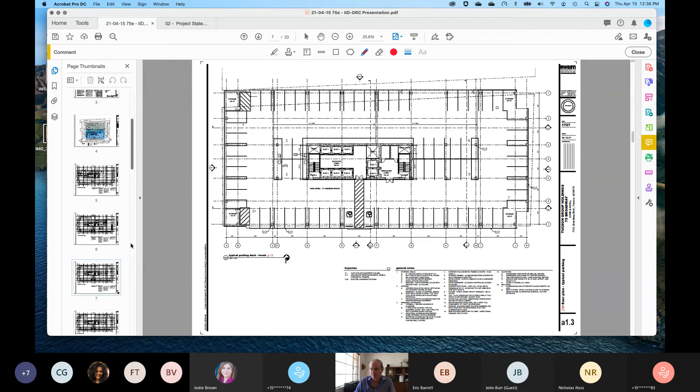Michael, is there an option on that? Do you still get the benefit from those additional stalls? It seems kind of counterintuitive that we're trying to promote less vehicle traffic, more pedestrian circulation, more downtown urban growth, but we can't count parking spaces because they're 2 feet shorter, even though most people are driving smaller cars.

Yeah, so the way I look at this is those additional 50 stalls will still be there, they'll still be used, and they can still rent them. It's more of a procedural issue with getting the IPP approved in terms of what our baseline parking is versus what we're actually proposing. So from a functional perspective, it doesn't change what we're doing, it just changes the way we have to do our study for the IPP.

One other quickie on the retail, you said it's now at 22 feet. Would that allow you the potential for building mezzanine space if more floor space is needed for a tenant? Yes, and that's exactly what we were thinking by increasing it. So if you had a tenant like an Urban Outfitters or even a Walgreens, they could go in there and build a mezzanine. Yeah, that would be preferable. It also looks better proportionately.

So you're just looking at the corner two bedroom apartments having balconies for the entire building except for the top floor roof decks. That's correct. Okay, all right.

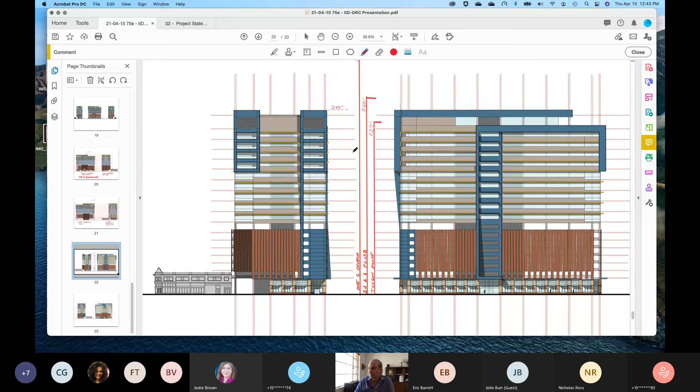That's it for me though. Keep going on it, yeah, thanks. The overall concept's fine. Yep. Thank you, Michael. Yeah, thank you. We appreciate it, and hopefully we'll be back soon. Thank you. See you in 3 weeks. Thanks, sounds good.

Okay, next item on the agenda is call to the audience. Doesn't appear we have any.

Then future agenda items, Nick. Yeah, Mr. Chair, members of the committee, we do have actually just this week received a new application for a larger mixed use building on the west side called the Bautista. They have just scheduled for a pre-submittal, so we do expect that to be coming your way probably in the next few months. In terms of other active IID projects, I think that's the only one on the horizon, but we will certainly keep you informed as soon as we hear more activity coming your way.

And Nick, where on the west side are you speaking of? Yeah, so it is just east of the Gadsden development. It's adjacent to the Santa Cruz River, so near over by Caterpillar there. Okay, great.

Can I ask a question of Nick, just for future reference? We have a call to the audience - are audience members allowed to participate and speak during this meeting? Mayor and council have that, a couple others do, but other boards do not. I was just wondering, I assume because this is city manager, we can allow it since it's not city clerk's purview? Are you referring to speaking to items on the agenda? No, is the format of this meeting that if people from the audience wished to speak, they would be allowed to? Some meetings don't allow that. Correct, yes, the call to the audience item is consistent with other board and commission meetings. Although this isn't directly driven by the clerk's office, we do include that in this agenda as well. Okay, so members of the DRC, this is not a public hearing, it's a meeting open to the general public. So those who attend that are not the applicant can observe, and it's up to the chair of the DRC to allow them to express any opinion. But the purview of the DRC is based on what is included in the requirements per the UDC. Okay, thanks. Thank you, Maria.